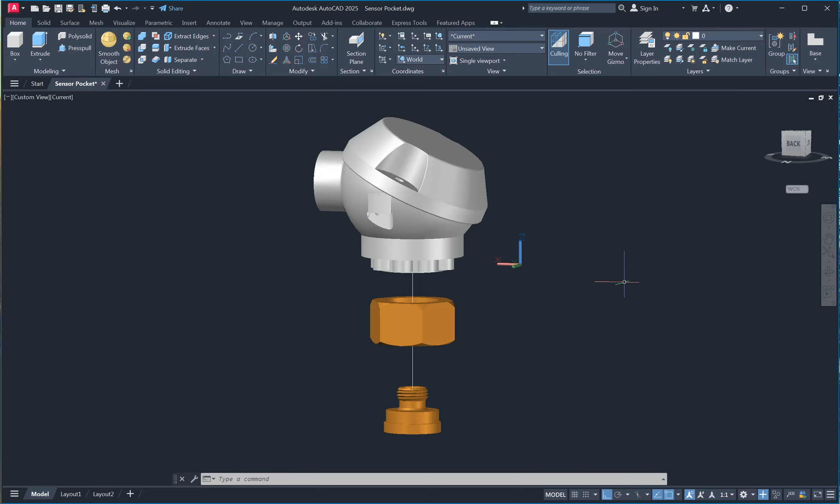Today I want to continue about how to draw sensor pocket in AutoCAD 3D. This is the previous video I already saw. The next video today I'll show the sensor pocket is thermal. So let's start.

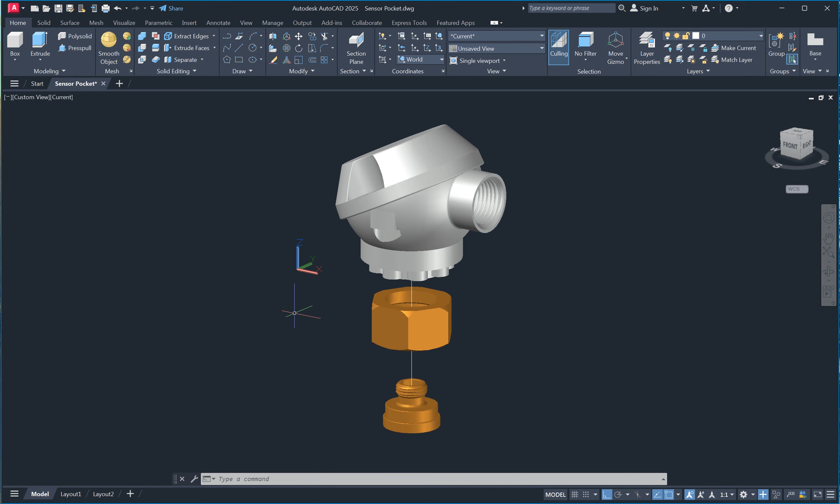First I go to 3D polyline. I create the line, 25. Then go to create this point to connect to the sensor pocket.

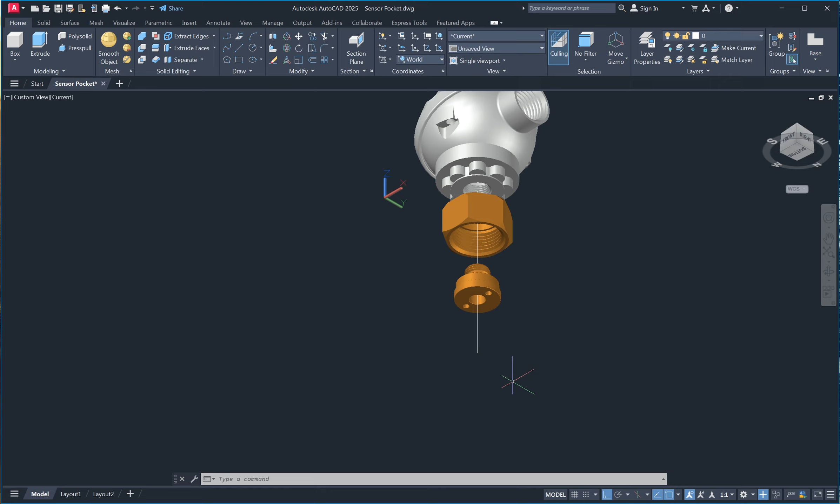This diameter is 19.80. With command circle, C enter, specify center point, click, specify radius of circle or diameter, D means diameter. Diameter is 19.80. Enter.

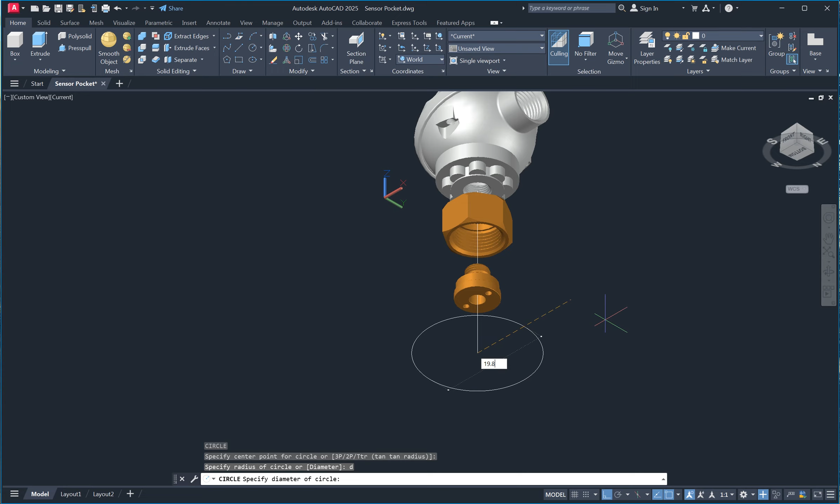Here, 19.80. And then this one, extrude height 5.1. EXT, enter, select object to extrude, enter, specify height of extrusion 5.1, enter.

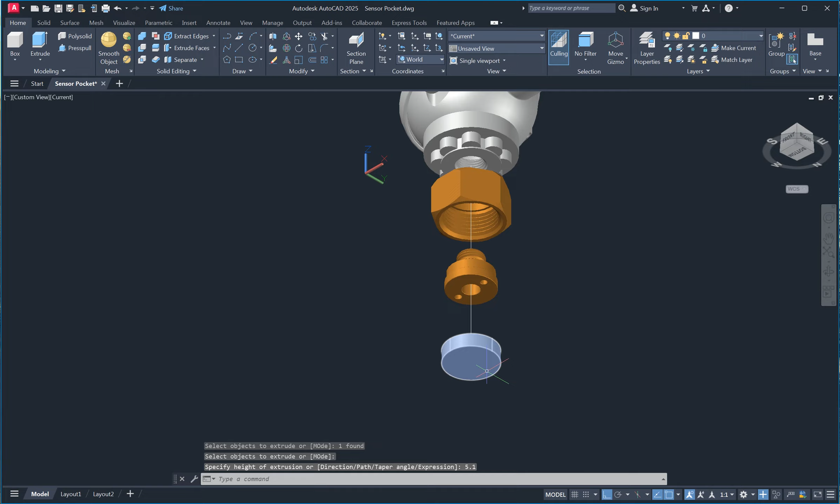We can try this. So in here we have a thread. So we create the thread using the helix command.

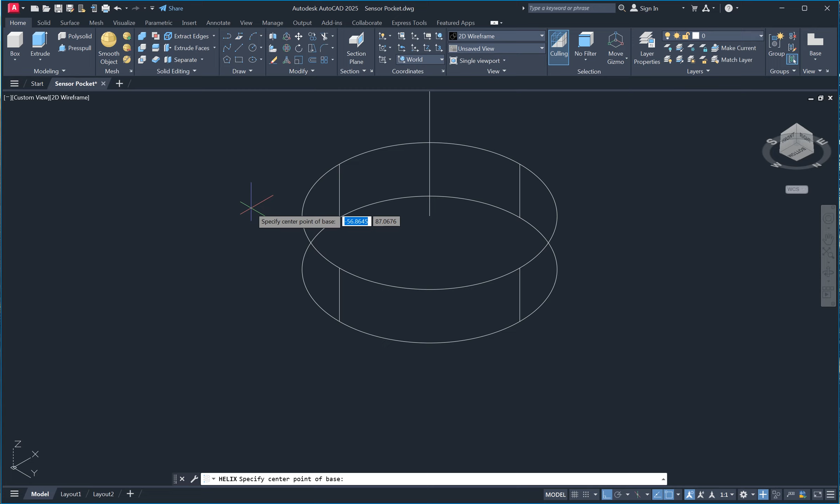Go to view, 2D wireframe, go to draw, helix. Specify center point of base, specify base radius, click here, and specify top radius, the same. Then specify height, helix height.

So select object, right click, go to properties, okay, and then turn. Turn height 1.5. Turn height 1.5.

So I create one circle to make a thread. Go to back view. C, enter, specify center point, click here, D, enter, specify diameter of circle 1.5, enter.

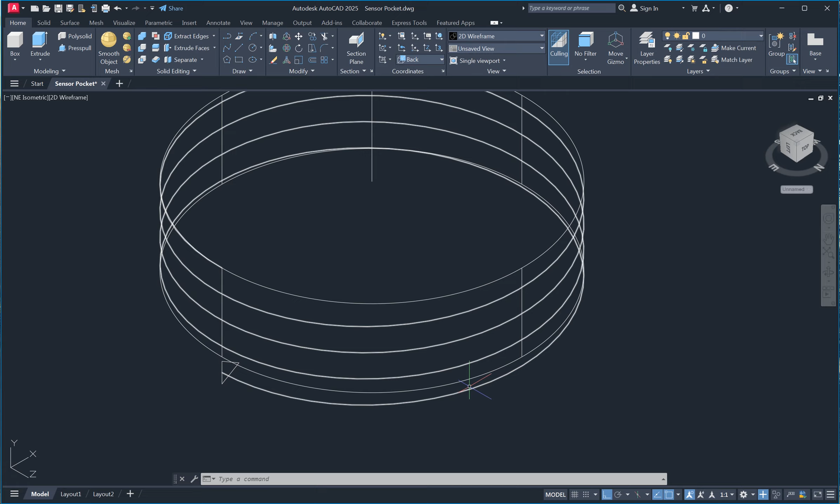We need to move. M, enter, select object, enter, specify base point, click here, and specify a second point, click here. Select object again. Here we need to extrude along the path, along the helix, but before that we need to chamfer the object here.

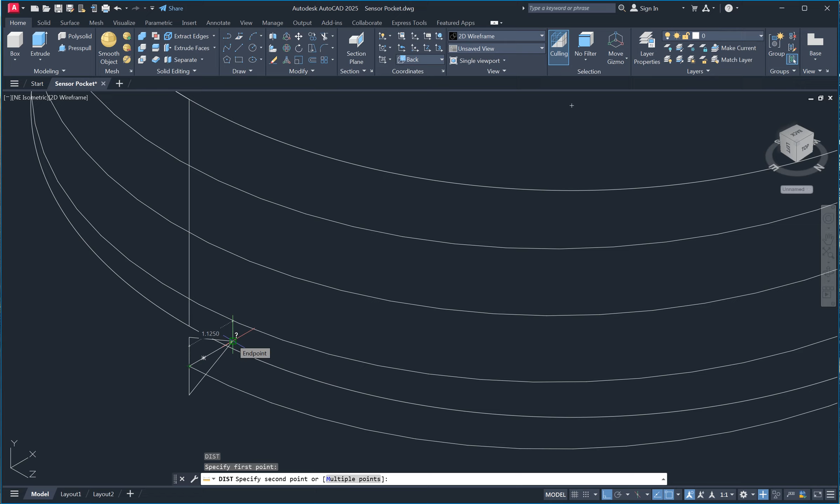So before chamfer, we can measure this. DI, enter, specify first point, click here, and second point here. 1.125.

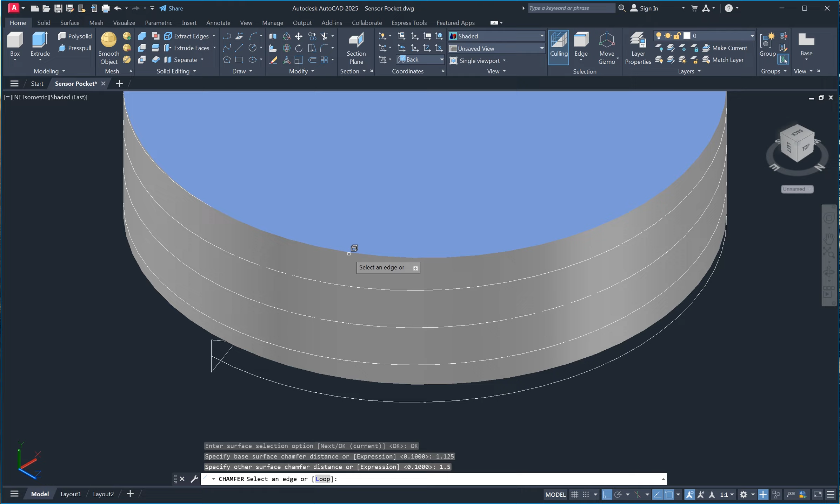CHA enter, select first line, okay current. In here is 1.125, enter, and this point is 1.5, enter, select, select here, enter.

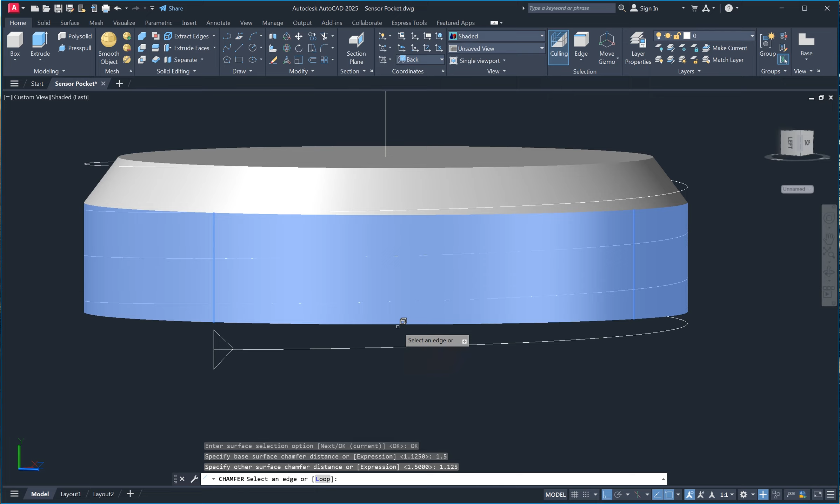Now we got like this, and this side the same. CHA enter, select object, okay current. This side is 1.5, enter, and this side, the back side, is 1.125, enter, select, select here, enter.

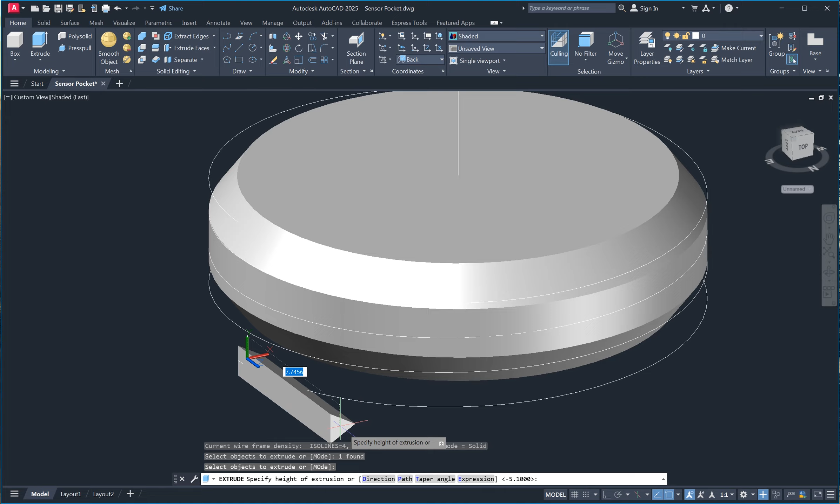Now we get like this. The next step, we extrude the polygon. EXT, enter, select object to extrude, select this polygon, enter, specify height of extrusion. So we choose path, click here, or P, enter, and then select extrusion path. So select here, we get like this.

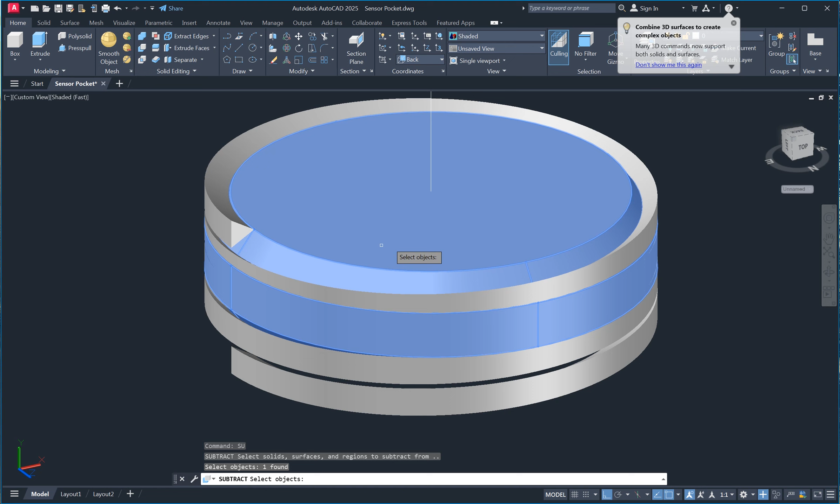The next step, we subtract. SU, enter, select object we need, meaning object we keep, enter, and select object we don't need, meaning cut out, enter. Now we get like this.

Now this point is already done, and go to here. That point is diameter 17.55. So we can measure it, DI, enter.

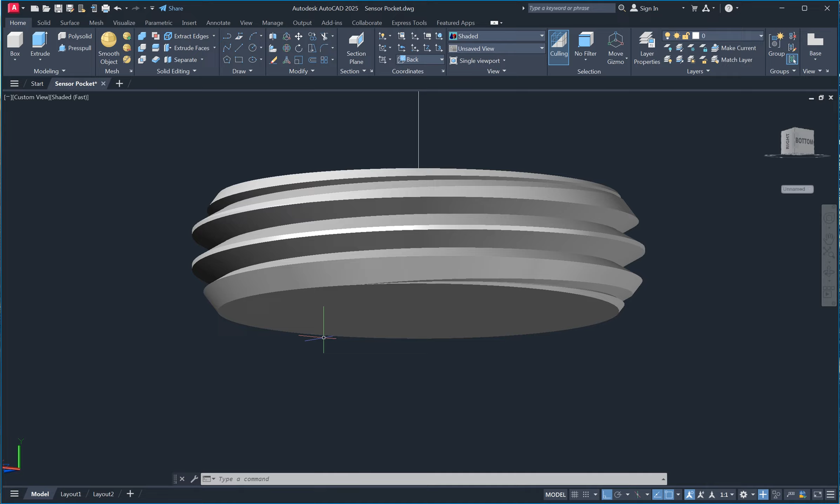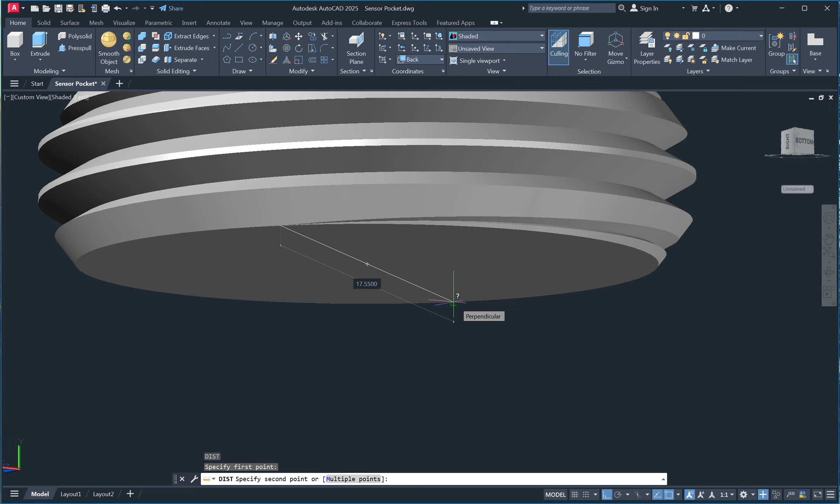Center point here. DI enter. Here, right, the same, 17.55. So we can presspull this one. Presspull height is 3.

We'll go to presspull, select object or boundary area, boundary area. Specify extrusion height 3, enter.

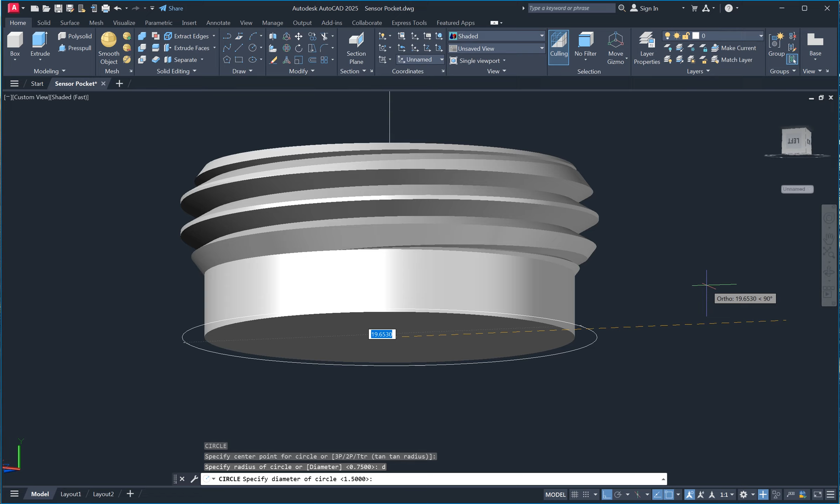The next step is here. Diameter is 21.92. So we use command circle to create. C, enter, specify center point, click here, D, enter, specify diameter, meaning 21.92, enter.

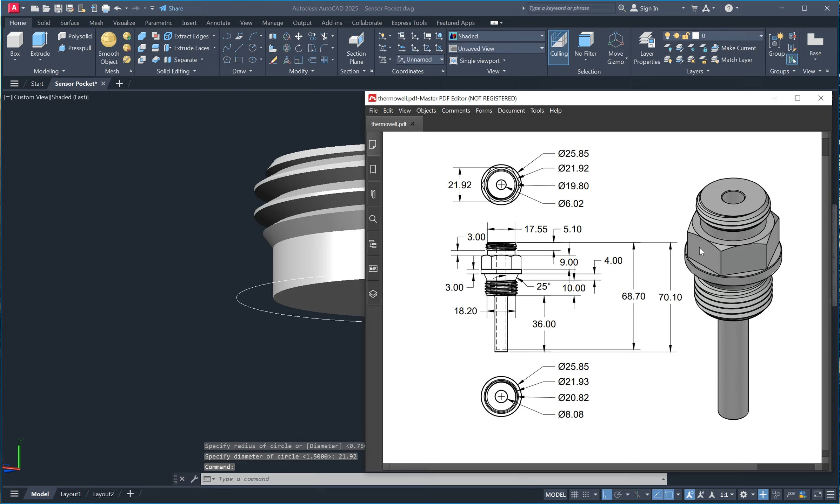And then we use command polygon to create 6 sides here. POL, enter, number of sides 6, enter, specify center point of polygon.

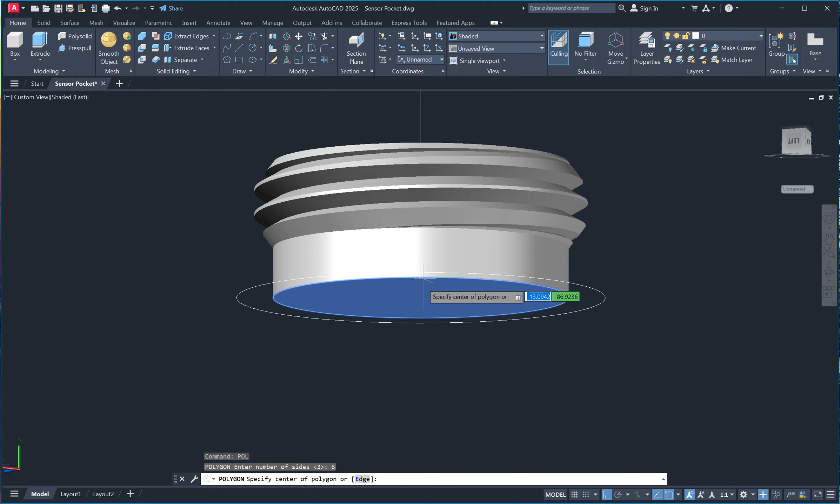And then we use circumscribed about the circle. Specify radius of the circle, click here.

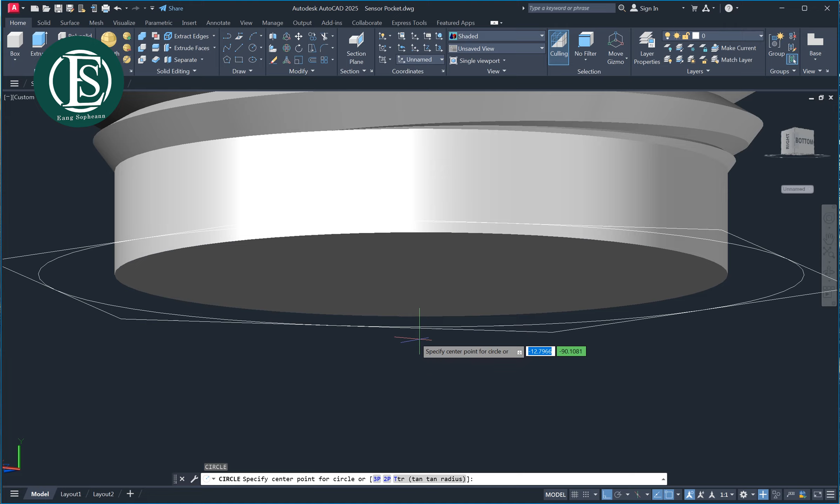So the next, we create one more circle. C, enter, specify center point of circle, and specify radius of the circle. So radius of the circle, we click here.

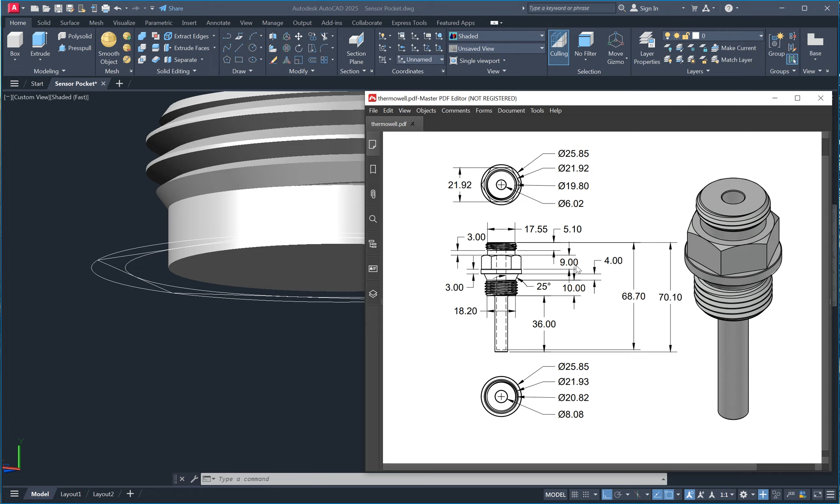Continue, we extrude these two objects, circle and polygon. The height is 9. EXT, enter, select two objects, circle and polygon, specify height of extrusion 9.

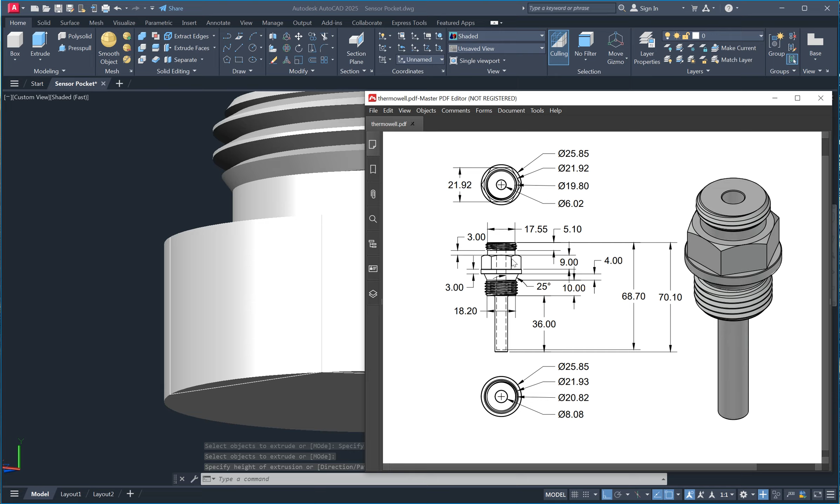In here we have a chamfer here. So we can go to measure. DI, enter, can measure here, to the polygon.

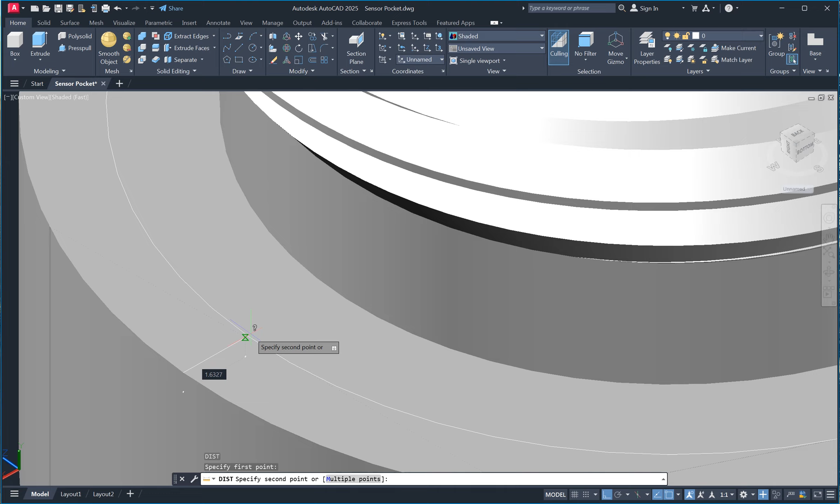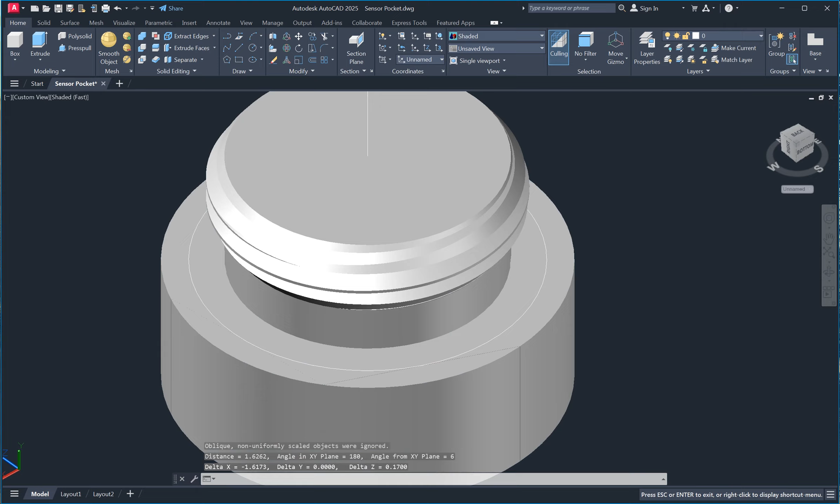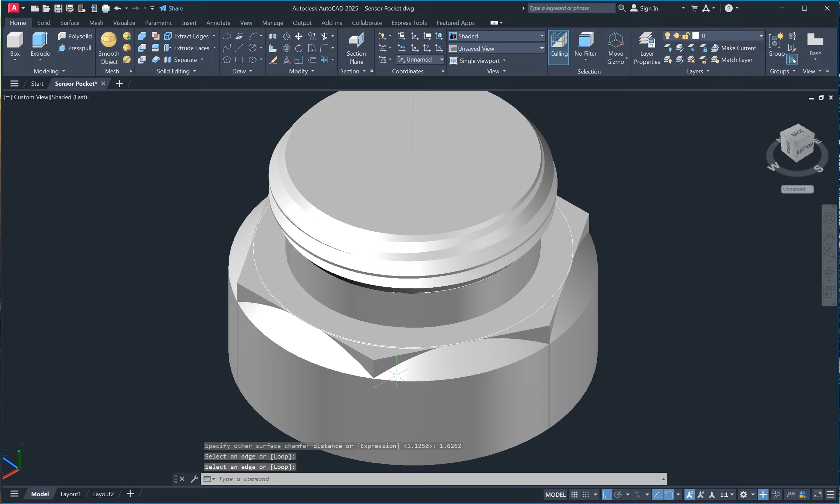One point, 1.6262. So CHA, enter, select first line, select here, OK current. 1.6262, enter. 1.6262, enter, select an edge, select here, enter. And then we use command intersect, enter, select object, select the two objects, enter.

Now we get like this. We can erase this object, circle, select and enter.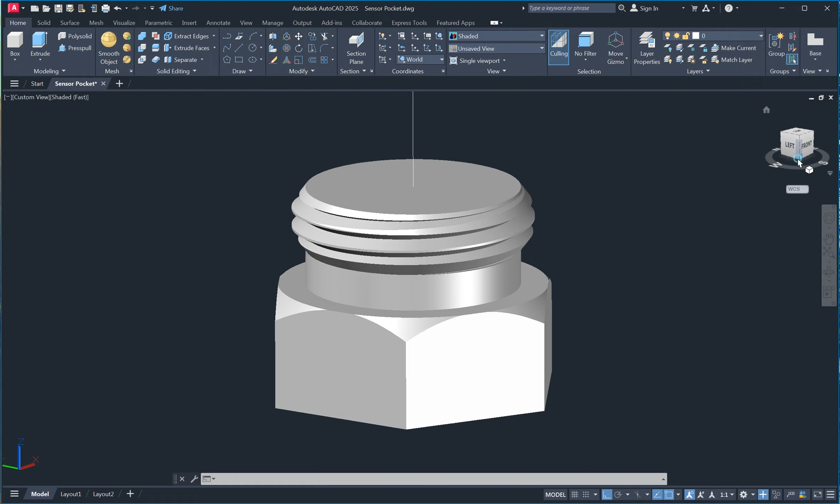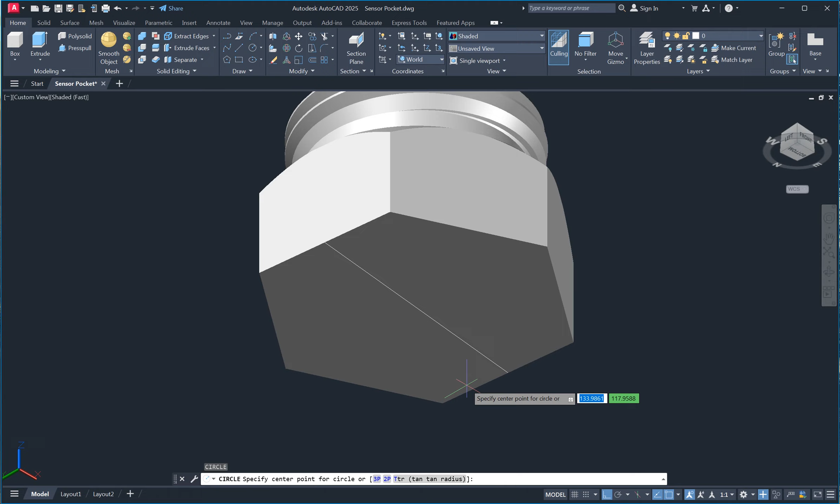And the next step is here, 25.85. So we create one circle. First we create a polyline because we delete all the center point. C, enter. D, enter. 25.85, 85, 25.85, enter.

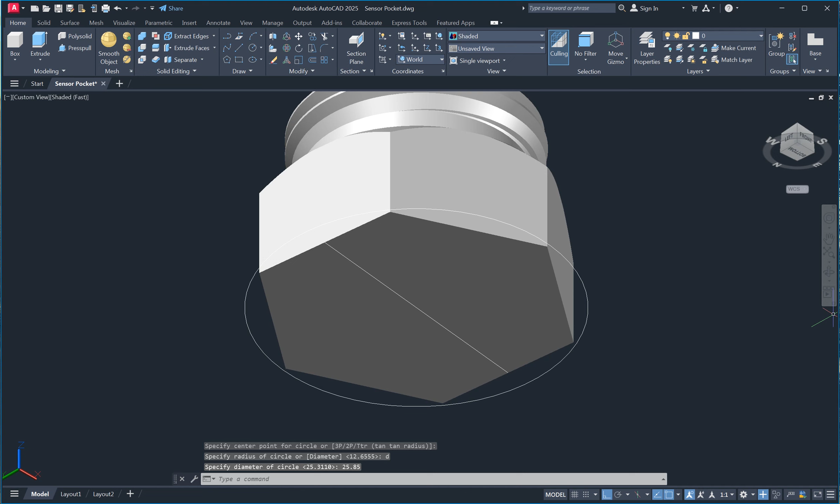And then we extrude here 3mm. EXT, enter, select object to extrusion, enter, 3, enter.

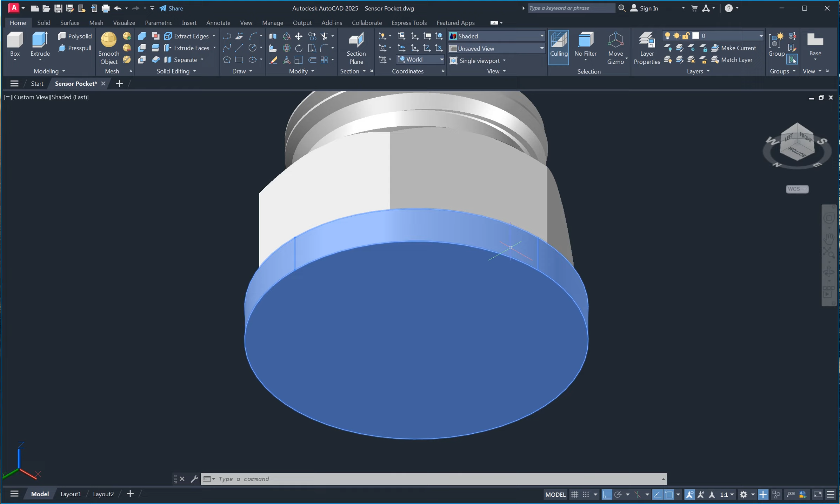In here have a chamfer. Chamfer 1, we can chamfer, CHA, enter, select object, OK current. Point 2, enter, point 2, enter. Point 2, point 2.

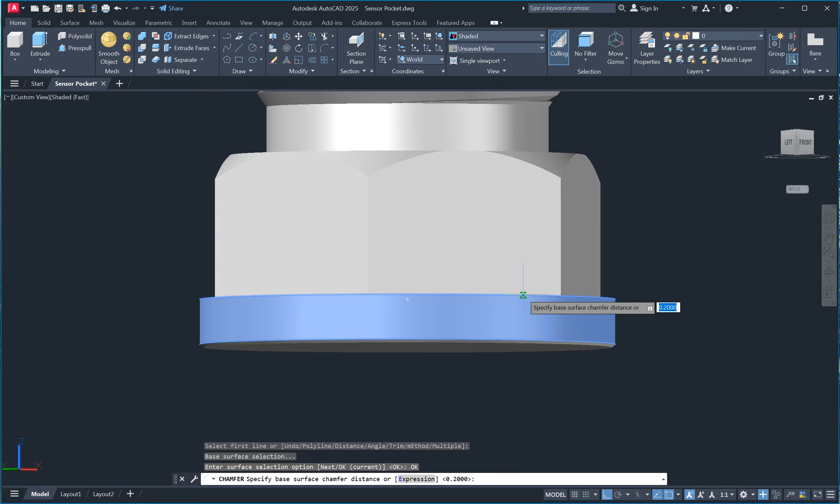Again, CHA, enter. Select first line, OK current, point 2, select here. We can union here, UNI, select object, select object, select object, enter.

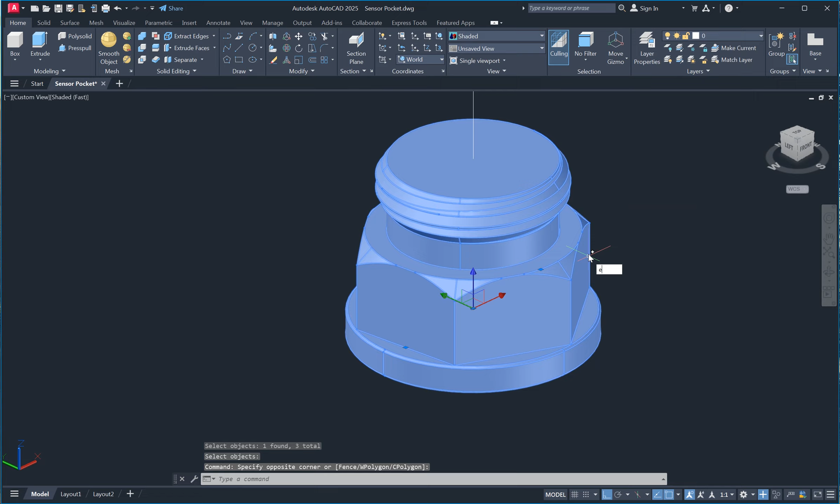Continue to this point. Yeah, this point. The height is 4.

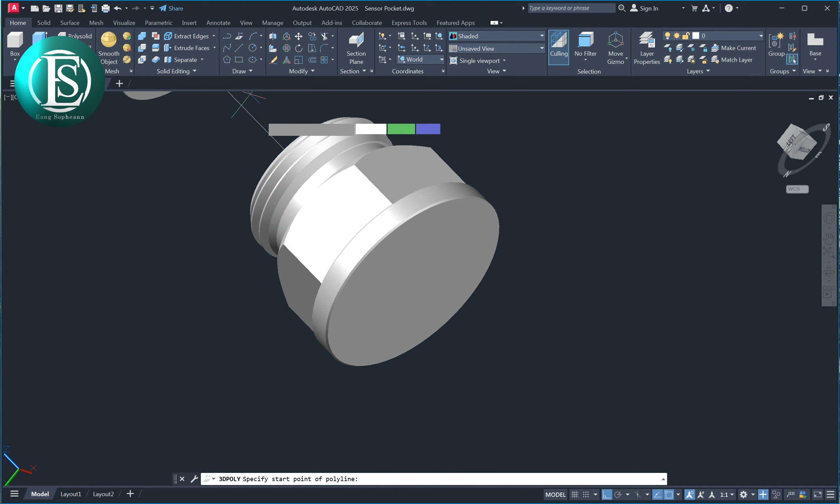And the bottom point is 18.20. So we create one line. Four.

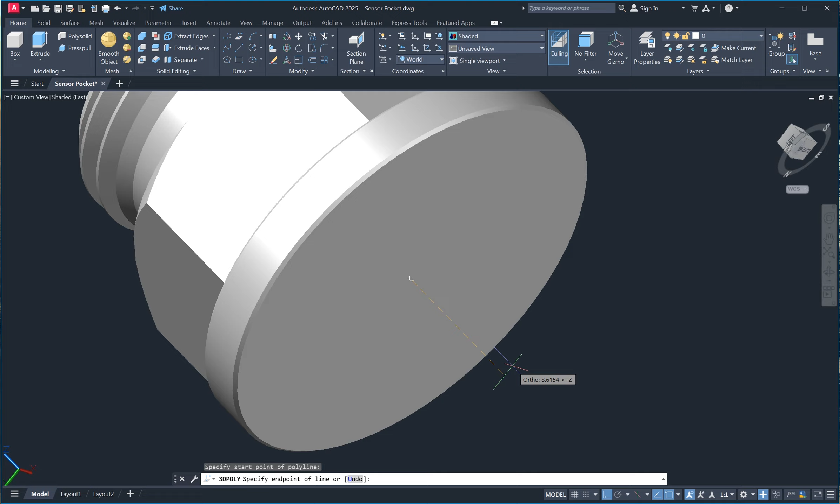Command circle, C enter, specify center point, click here. Then enter diameter 18.2, 18.2 enter.

And then we extrude with taper 25 degree. So EXT enter, select object to extrusion, enter, and taper angle T enter, minus 25 enter, 4 enter. We get like this.

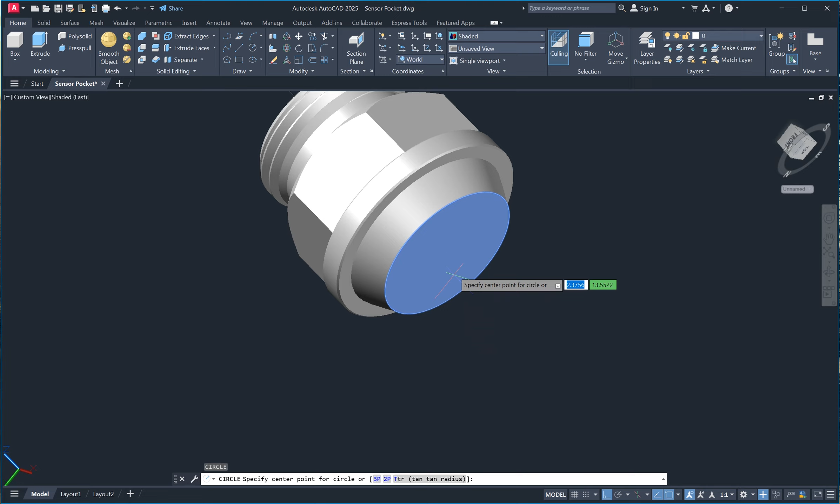Next here, here is 20.82. C enter, D enter, 20.82. 20.82 enter.

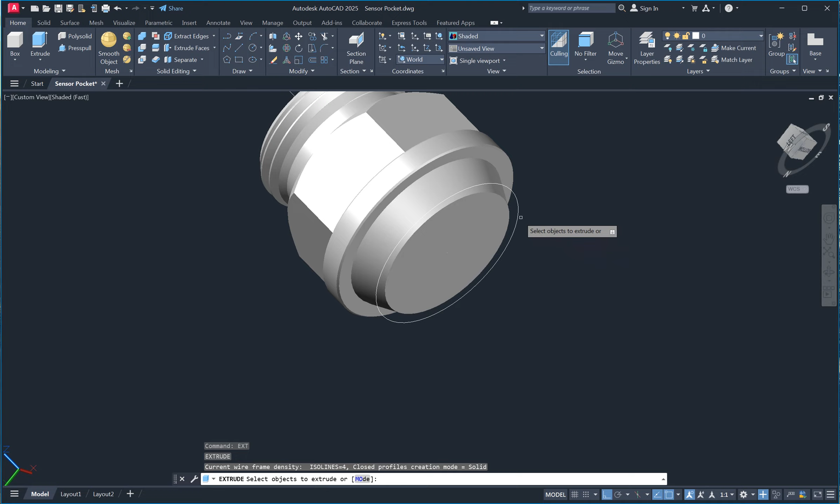And then extrude 10. EXT enter, select object to extrude, enter, specify height of extrusion and enter.

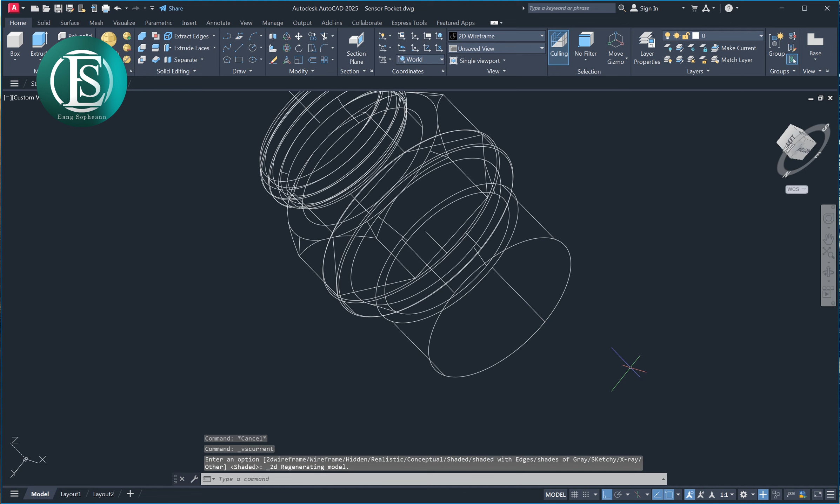In here, we can add a strip with the peak to peak is 1.75. So we go to the wireframe, go to draw, helix, specify center point of base here, specify base radius here, specify top radius at the same point, and specify helix height here.

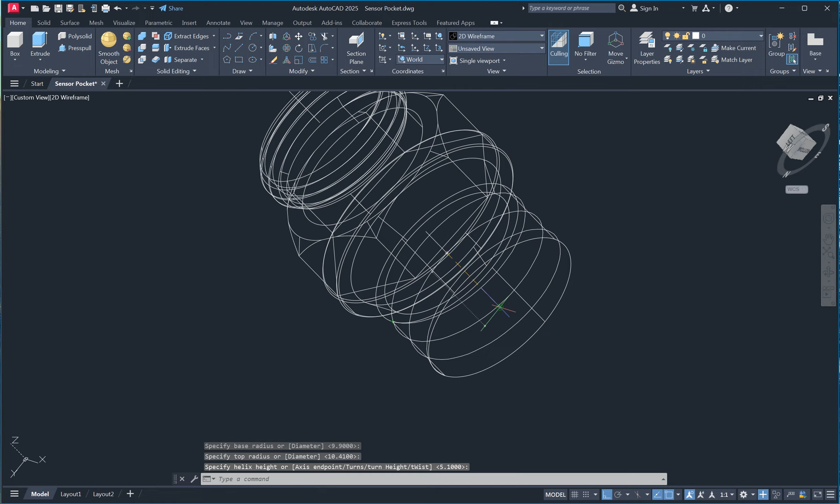Select object, right click, property, turn, we go to 7, we can go 6, yeah, we change the turn height to 1.75.

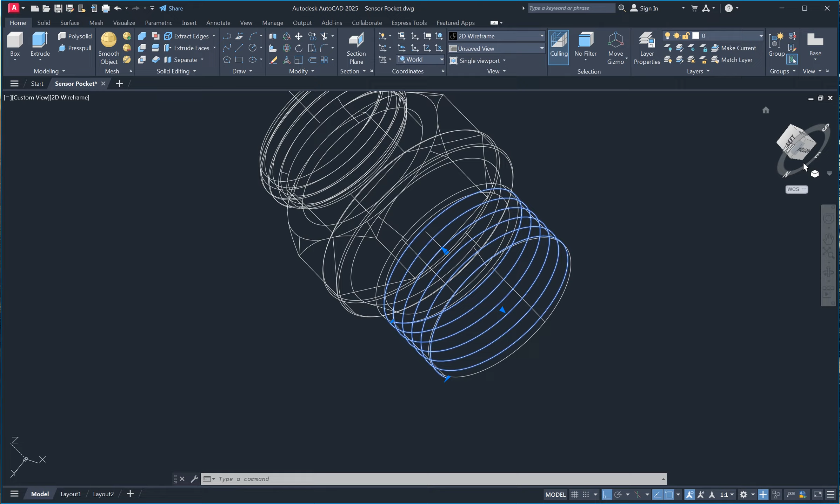Like this, close, now we get like this, and then we go to left, choose the left, and create circle. C enter, specify center point, D enter, 1.75 enter.

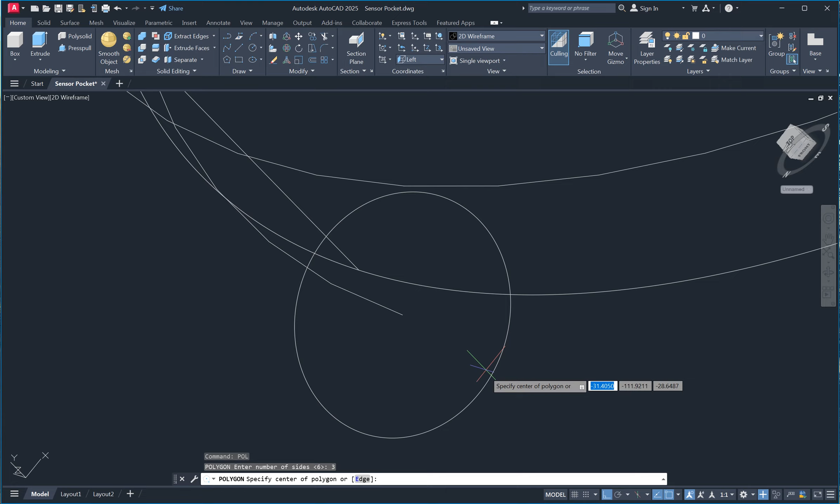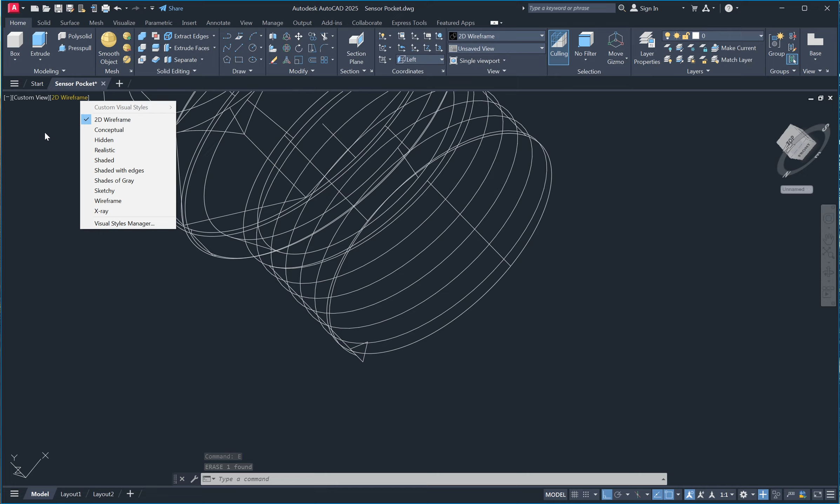The same step like before, we measure this, DI, measure this, 1.3125, 1.3125.

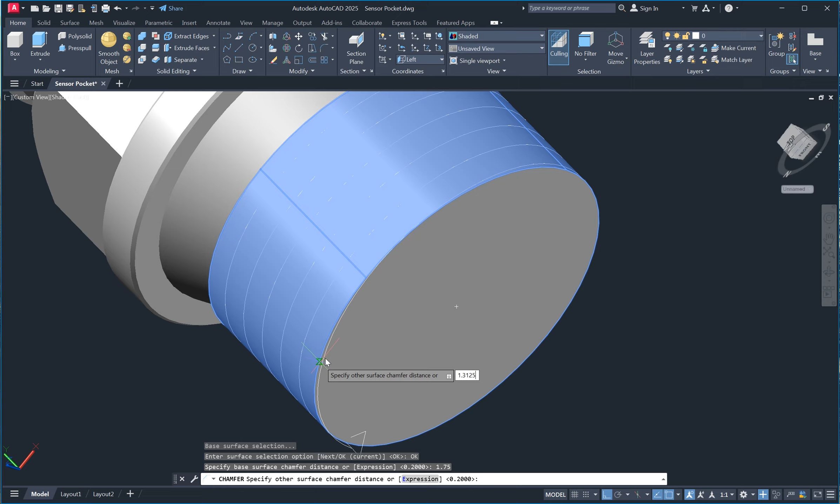So CHA enter, select first line here, okay, 1.75 enter, 1.3125 enter, select an edge, select here, enter, and do the same.

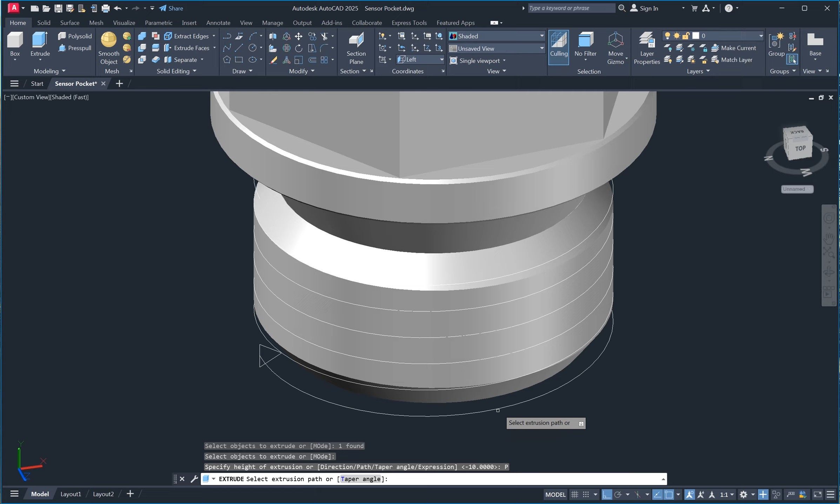CHA enter, select OK current, specify base surface chamfer distance the same 1.75, specify other surface chamfer distance the same 1.3125 enter, select an edge, select here, okay. Next we extrude the polygon along the path. EXT enter, select object to extrude, enter, specify height of extrusion, so we go to paths, select path, select extrusion path, select here, and then we use command subtract to cut. SU enter, select object we keep, enter, select object we cut, enter.

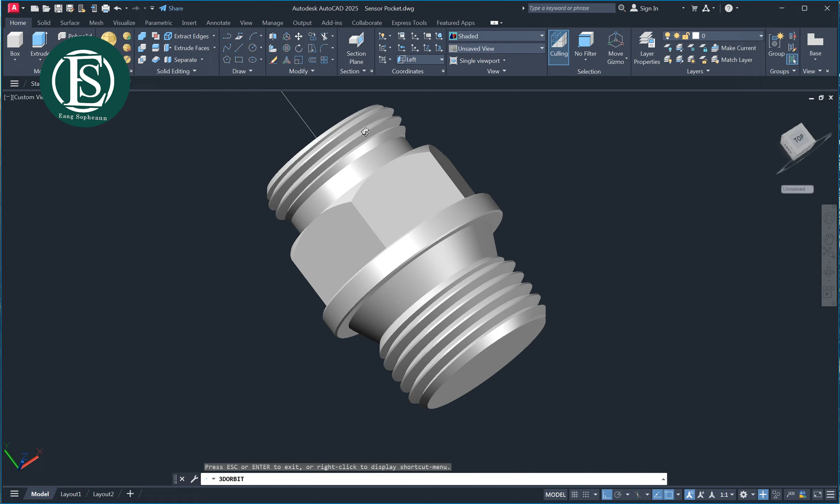Now we get like this. This point is connected to the engine body or pipe or cylinder head like this, and the point connects to here, sensor pocket with the union connector nut here.

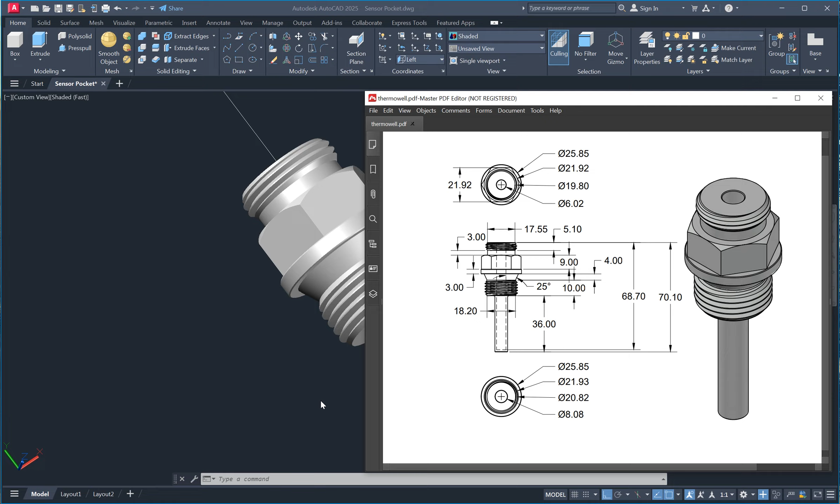So we go to next step is here, and here is diameter 8.08. So we create circle, C enter, D enter, 8.08 enter.

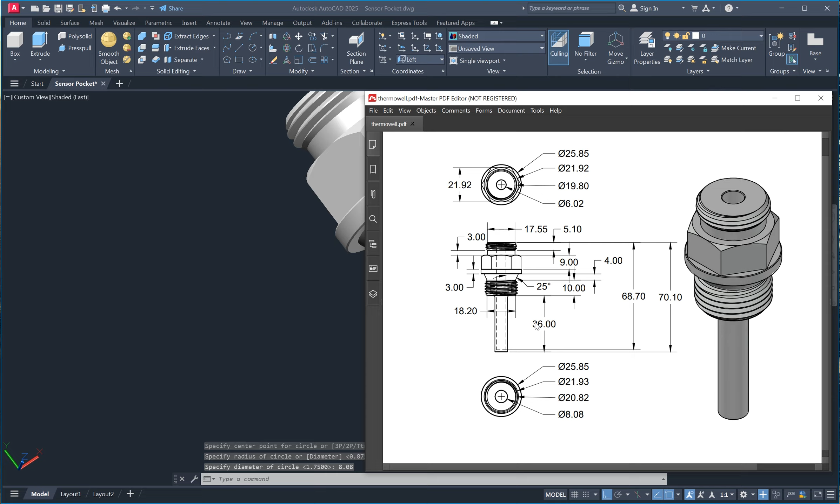We presspull 36. So go to presspull boundary area 36, enter. Now we get like this.

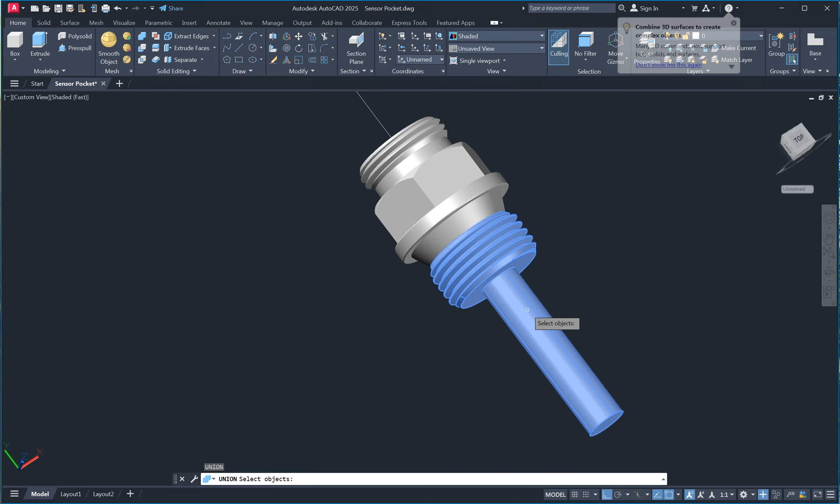So we can union this object to one object. U and I, enter, select object, select object, select object. Yeah, now it becomes one object. We can erase object inside, select and enter.

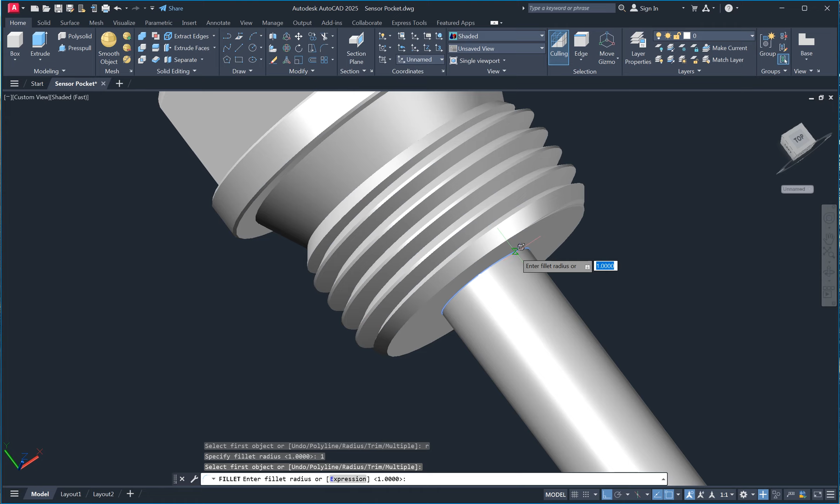In this point, have a fillet, F enter, or enter 1, enter. Select first object, enter, select an edge, like this.

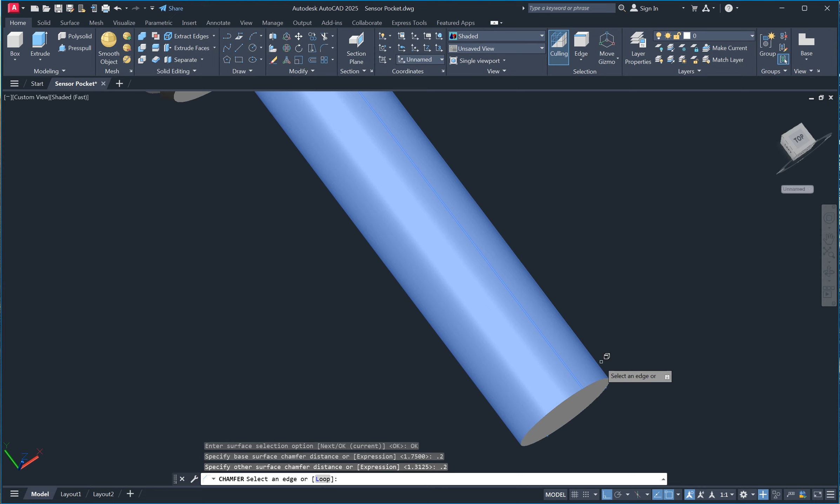And here have a chamfer also, CHA, enter, select object, OK, current. Specify base surface chamfer distance 0.2, enter, 0.2, enter. Select an edge here, enter.

And inside here have a hole, so we create one more circle here. The hole inside is 6.02. So C, enter, specify center point of the circle, D, enter, 6.02, enter.

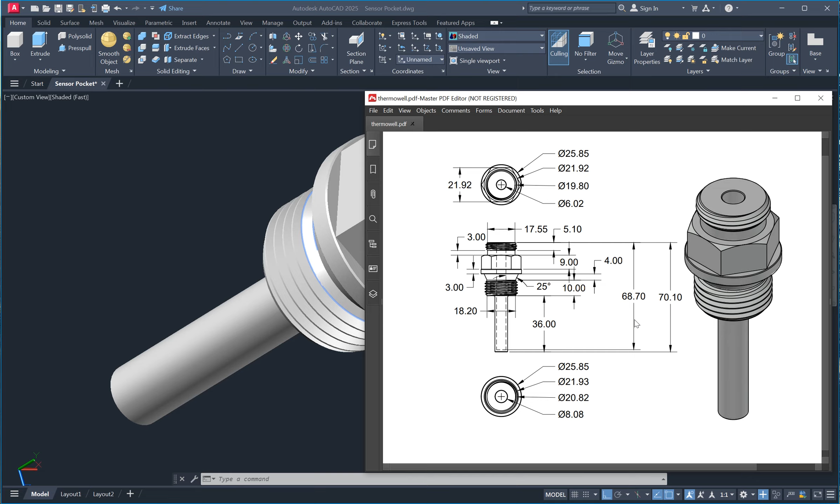And here we extrude 68.70. So we use command presspull boundary area, specify extrusion height 68.70.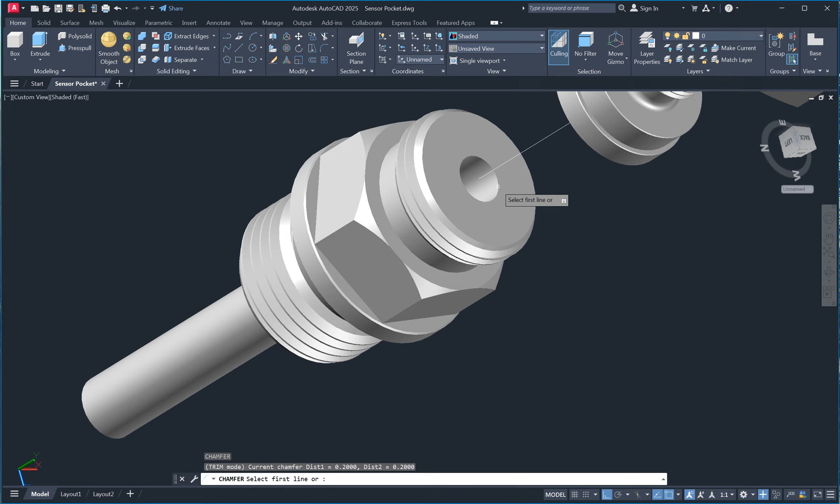And this point have a chamfer the same, select the circle, E, enter, CHA, enter, select object, OK, current, specify base surface chamfer point, 0.2, 0.2, select an edge, select here, enter. Again, select object, OK, current, 0.2, 0.2, select an edge, CHA, enter, select object, OK, current, 0.2, 0.2, select an edge here, OK.

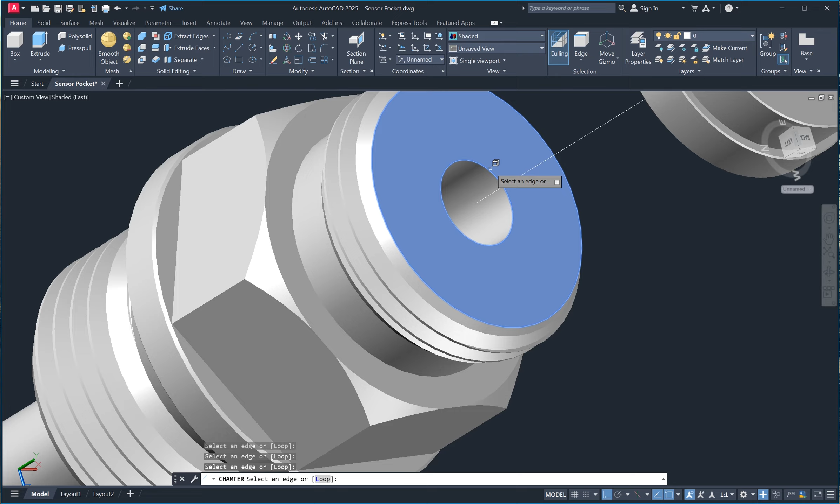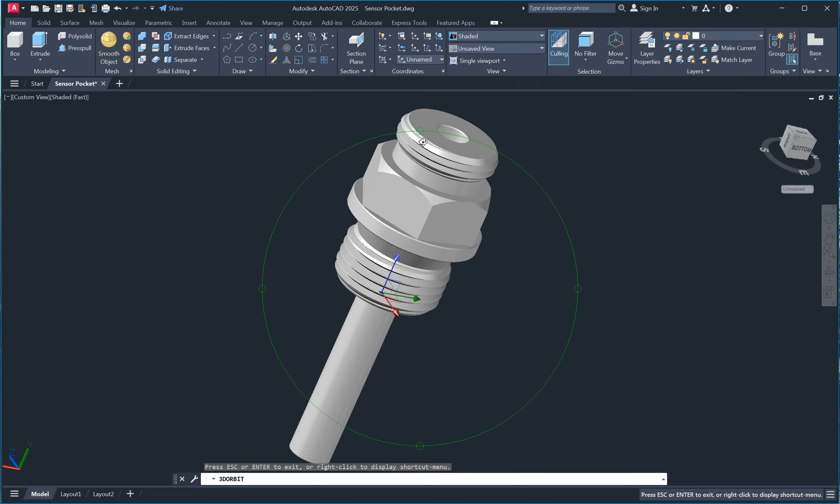Now we get thermowell like this already. So in this video, we showed how to draw a sensor pocket. This is the part of a sensor. It's called thermowell. We finish. Thank you for watching.